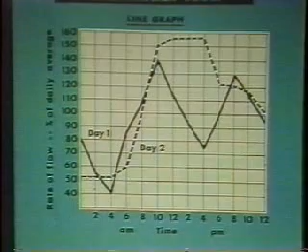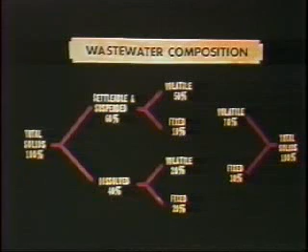So let us look at the solids content. When we take a sample of sewage and dry it, we have the total solids. That's also called residue after evaporation. Those solids have various components. One is the settleable and colloidal solids. The other one is the dissolved solids. And among those, you have a volatile component and the fixed component. Approximately, the volatile component is the organic portion, for example, proteins, fatty materials, and carbohydrates. The remaining portion is called fixed or mineral or ash. Those are primarily inorganic in nature. So the sewage treatment plant has to be designed to focus on both those components.

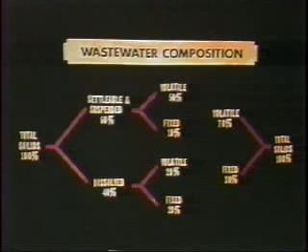Among the volatile organic matter in the municipal wastewater, the majority is biodegradable. Of course, we have small concentrations of toxic chemicals. Unfortunately, most of the treatment plants are not designed to remove those toxic chemicals. Among the minerals, you have calcium, iron, sodium, inorganic phosphate, inorganic nitrogen. All these components are there. So the engineer has a challenge to look after both components.

For example, when we look at the various properties of municipal wastewater, one of the criteria we have to look at is the pH of the water. Neutral water has a pH of 7, neither acidic nor alkaline. Sulfuric acid has a pH of 0. Lemon juice has a pH of 1. Orange juice has a pH of 3. Milk around 6. Whereas caustic soda has a pH of 14. So acidic waters have a low pH and alkaline waters have high pH. In connection with acid precipitation, when rainwater has a pH below about 5.7, that is called acidic precipitation. Whereas neutral water has a pH of 7.

And do you try and adjust it higher? Yes. For example, if you want to remove the inorganic phosphates, which create eutrophication problems in lakes because of excessive growth of algae, we want to remove the phosphate, or PO4, and the most economical method is chemical precipitation. For that we add lime into the wastewater, increase the pH to about 9.5 or 10, and then knock down the phosphate to the bottom of the tank. There are many plants in Ontario which used this method in the 70s and early 80s.

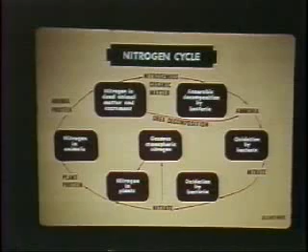Municipal sewage is a high concentration of organic matter and ammonia, and in biological treatment plants, that is converted into nitrate. Later on, it is denitrified from nitrate into nitrogen gas, and that escapes into the atmosphere. And nitrogen gas being inert, it has relatively very little negative impact on the environment. I didn't realize that. So if we want to remove the nitrogen from the wastewater and to save the receiving waters from eutrophication or biological oxygen demand, the best method is to go for nitrification and then denitrification. So for that we have to understand the nitrogen cycle there.

Of course, we all know that nitrate is consumed by algae and other plant life. Plants are consumed by animals. The animal protein, when the animals die off, the microorganisms decompose the animal proteins, resulting in ammonia. So that is how the nitrogen cycle is completed. And in the sewage treatment plant, a part of the cycle takes place.

So in the next illustration, we have some idea about pollution of the rivers and lakes as a result of carelessness of man in looking after the receiving water. Whereas a clean stream, which is properly maintained, can be enjoyed by the people for recreation, boating, fishing, so on and so forth.

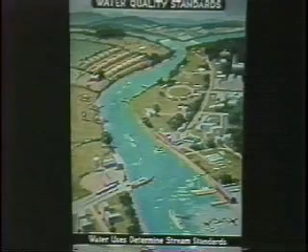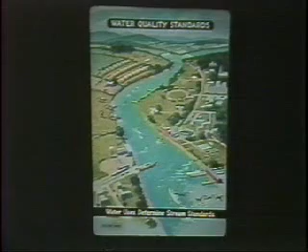For achieving that goal, the government of Canada as well as government of Nova Scotia have water quality standards. What is the minimum amount of oxygen that should be maintained in the stream so that fish and other desirable aquatic species can live in the system there. So when we design these sewage treatment plants, we use guidelines or manuals which are prepared by government agencies, and we follow them in order to design the most cost-effective sewage treatment plant.

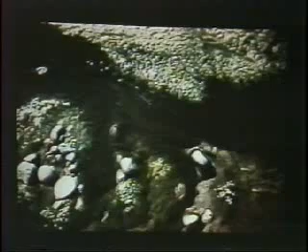I was talking to you about the problems caused by the excess amounts of inorganic nutrients, namely nitrogen and phosphorus. If these excess concentrations are discharged into the lakes and rivers, we can have uncontrolled amounts of algal growth, and nobody likes to have high concentrations of floating algae forming a scum on lakes. So the property values in the neighboring areas will go down. When this water is used for human consumption, there will be unpleasant taste and odor. In the water treatment plant, the filters will get clogged, and obviously the water cannot be used for recreational purposes.

It is extraordinary. Some of the lakes have been so badly polluted in North America. As a result of that, there is an abundance of algal growth. Of course, in Nova Scotia, we are fortunate to have a low concentration of people or low density of population. As a result, our pollution problems are not as serious as they are in other parts of the world.

So this illustration shows an example of an extreme case of what can happen when man discharges uncontrolled amounts of inorganic nutrients, that is nitrogen and phosphorus, into lakes. It looks like the stream's almost plugged or dammed. Yes. So this illustration is an extreme case to emphasize the point about the adverse effects of excessive nutrients.

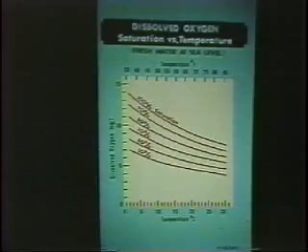You can express dissolved oxygen as milligram per liter or as percent saturation. Biologists will say sometimes that for certain fish species to live, you have to have minimum, say, 40% saturation or 60% saturation or 70% saturation. But engineers tend to look at it in terms of milligrams per liter. So when I train my students to design sewage treatment plants, I will tell them, let us have a minimum target of, say, 6 milligram per liter. See? Engineers go by numbers and biologists go by percent saturation.

Yeah, I think I can understand both ways. I think the animals have got to get the oxygen out of the water, and if there's only a certain percent there, they can only take a certain percentage. Yes. But if it depends on temperature and other conditions, the number of milligrams might not be enough in a certain condition. Right. So yeah, I can understand both situations. I see. Yes.

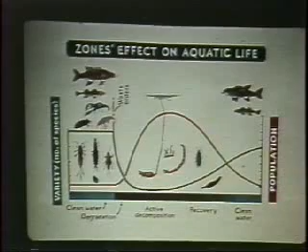Nature also has the ability to assimilate and digest the pollution. So as long as the amount of sewage going in is below a certain limit, the river can assimilate and recover from pollution. That is called the recovery zone. And once the river has recovered, we have clean water again. Unfortunately, in so many rivers now, the amount of sewage going in is so high and the concentration is so much that the rivers are not able to recover.

We're talking sewage now, we're not talking about chemical pollutants? This is true for all biodegradable organic waste. The waste could be from municipal sewage, from leachate, or from a petroleum refinery. Yeah, I suppose if it was toxic, it would never recover. Yes, that's a very interesting point. We are focusing on biodegradable organic matter. If it is a highly toxic waste, then most of the microorganisms and species are destroyed, and the river may never recover. Yes, that's an excellent point. Okay.

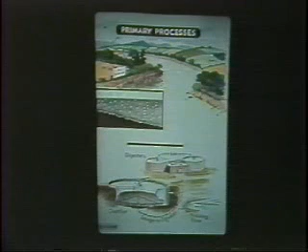So when we treat municipal sewage, in the beginning we have what is known as pre-treatment or preliminary treatment, in which there is a screen to remove the coarse solids, and the grit particles are removed. Grit is coarse sand and fine gravel, broken glass, eggshells. All these inorganic solids tend to create wear and tear, so that is called preliminary treatment. Once that is completed, we go in for primary treatment, in which the settleable organic compounds are removed. They go to the bottom of the tank, and that is called primary sludge.

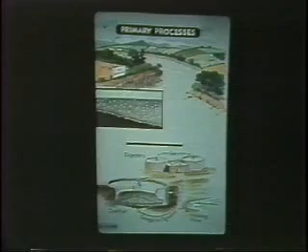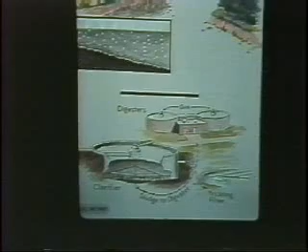So in the illustration we have, it shows in the lower half of the diagram a typical clarifier or a settling tank. That settling tank could be either rectangular in shape or it could be circular in shape. The one we are looking at now is a circular clarifier, where the settleable organic solids go to the bottom, and then that liquid is called primary sludge. Now that sludge has to be digested or fermented, and that is accomplished by sludge digesters.

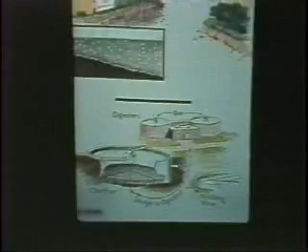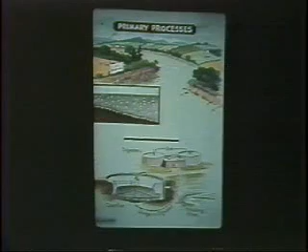That's still primary treatment? That is still primary treatment. Okay. Yes, primary treatment. In our metro area, Mill Cove has sludge digesters. Eastern Passage has sludge digesters. Lakeside and Timberlea have their own sludge digesters too. These digested sludge solids are taken to a lagoon in the airport.

Personally, I would like to see that these valuable biosolids are used on land for agricultural purposes. Of course, agricultural land is so far away from Metro Halifax area, so there is a high cost of transportation. But in small communities where land is available within short distance, it is economically and ecologically more attractive to use these biosolids on land. And this is done very commonly in Ontario in small communities. But big cities like Toronto and Halifax, it may not be economically feasible to haul the biosolids long distances.

What would happen if you put this sludge in forests? Yes, the digested sludge can also be disposed of on forest lands for growing Christmas trees, for example. This can be done. This is done in various parts of the world. Somehow in Nova Scotia it has not gained momentum. There are some communities like New Glasgow, Antigonish, which tried land utilization, but it doesn't seem to be economically attractive for Halifax. A little too far away. Too far away from the farming communities.

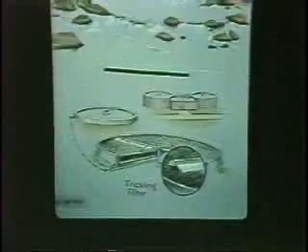After we have removed the settleable organic solids, we go in for the second stage, which is called secondary process. That is called secondary treatment or biological treatment. This can be accomplished by various methods. One of them is called trickling filter, where you have a solid medium or you have a plastic medium through which the wastewater trickles. When that happens, microorganisms grow on the top surface of the stone or plastic medium. In the 1960s and early 70s, we used gravel as the medium to grow the microorganisms.

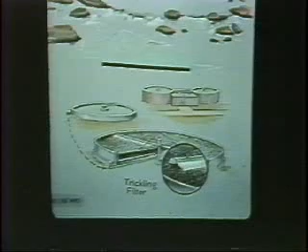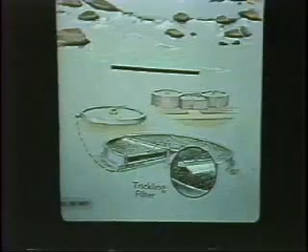But beginning in the mid-70s, chemical companies have come up with a plastic medium. The plastic media can be used for the same purpose. Those are called bio-towers. And we have one in Port Hawkesbury, which uses a bio-tower. We used to have one in Eastern Passage, which had a bio-tower. But when the Eastern Passage plant was expanded, they went from secondary to primary, and now they have only primary treatment and anaerobic digestion of sludge. We do have a stone medium trickling filter in a school in Hammonds Plains, and there are a couple of native reserves near Truro which also use stone medium trickling filters.

How long would the sewage have to stay in contact with this? I mean, what's the retention time? Few minutes. It takes only few minutes there, because the wastewater goes down the medium by gravity. The stone medium filters are about 6 feet deep, whereas the plastic medium filters could be even 20 feet deep. They have more porosity, more space, so they can handle deeper filters, and still they can maintain what are known as aerobic conditions. So this is where the bacteria, is it converting the phosphorus and nitrogen?

Yes, the microorganisms use the biodegradable organic matter as well as nitrogen and phosphorus as a source of food, and they grow and multiply. So the biological film will become thicker and thicker, and they will get sloughed off, and that is called a biological floc, and that is taken over to the secondary clarifier, and they are settled by gravity. So the biological treatment can be achieved by at least 3 different methods. One of them is trickling filter or bio-tower, which is what we have on the illustration there. We will come back to the biological treatment later on.

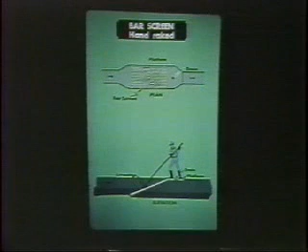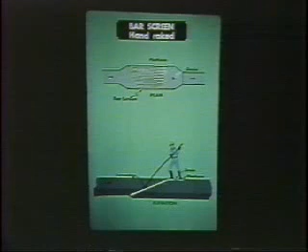I was talking in the beginning about preliminary treatment, that is to remove the coarse solids. In developing countries, these are operated manually. Screens are cleaned several times a day to remove the screenings. The solids are removed from the screen chamber manually. Of course, in developed countries and also in bigger cities, the cost of labor is so high. So during the last 30 years or so, we have been using mechanically cleaned screens to remove coarse solids.

Well, Dr. Thirumurthi, we only have approximately 1 minute left on this. Maybe we'll have to come back and do another show next week. But do you just want to sum up where we are at this point, what we've discussed so far tonight? Yes. We have discussed the adverse effects of pollution on rivers and lakes, and we have talked about the highlights of primary and secondary treatment, mostly for municipal sewage, and what are all the advantages of controlling the pollution. Okay, and next week we'll do another show probably on more sewage treatment facilities? Yes, we can continue on the highlights which we have touched on today. Okay, that would be good.